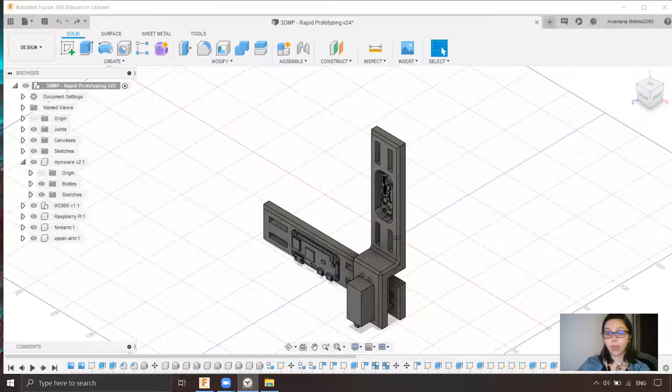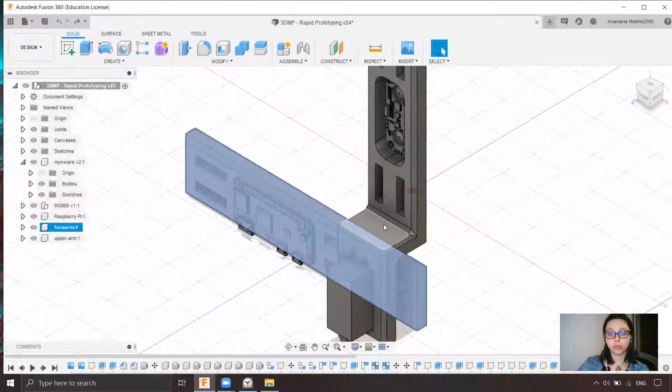Now that we have all the clearance for our hardware components, we can start adding the screws. A very important note is that we will not add the screws to 3D print them, but to properly communicate our design and to see that our 3D printable parts are correctly designed. So we will not create the screws and nuts ourselves.

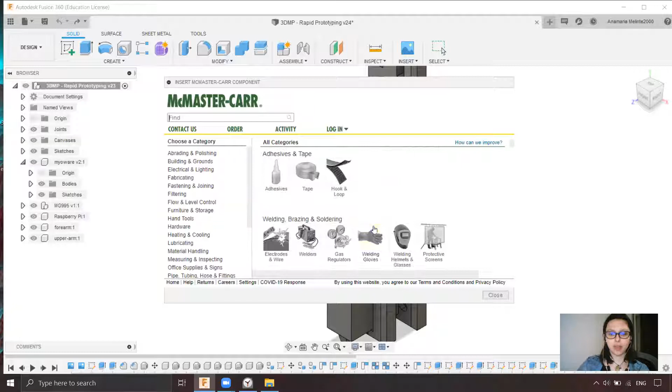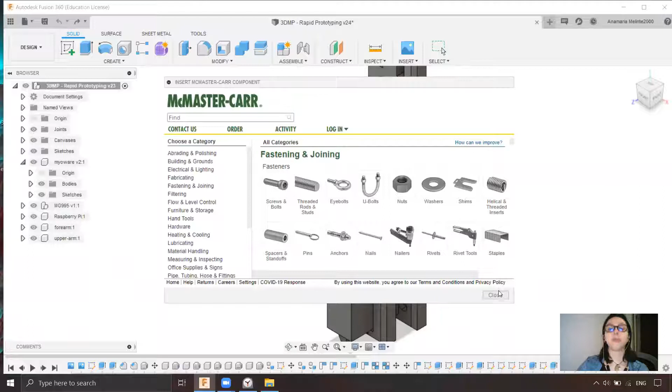We will use a tool called Insert McMaster-Carr Component. This is an entire catalog of bolts, nuts, screws, tape, and other things like bearings and shaft collars. This is a real catalog, you can buy those things. The idea of the catalog is to test the parts in your design, and if they fit, you can buy them.

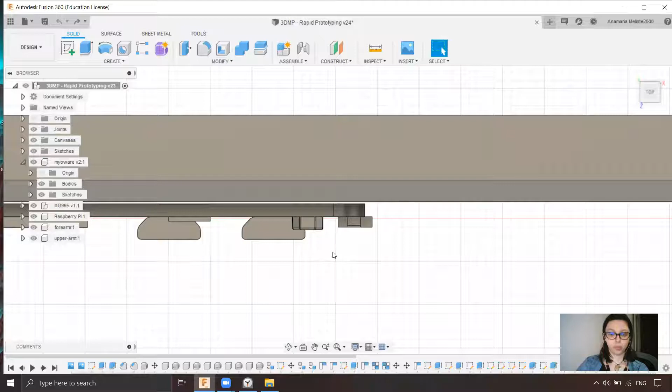But before we browse the catalog, we need to see what's the size of the screw and the nuts that we need. The idea of the screw we'll need for the Raspberry Pi is that it will go from this point to that point, and needs to be a little bit bigger so the nut will fit.

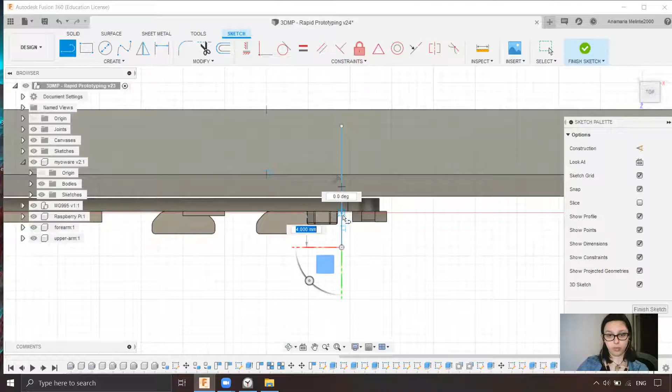Let's create a sketch, but we will not save it, just to see the dimensions. So let's say it will start from this point and go like this. We will use a 2 or 4 millimeter screw. This can work, so we will need a 14 millimeter screw.

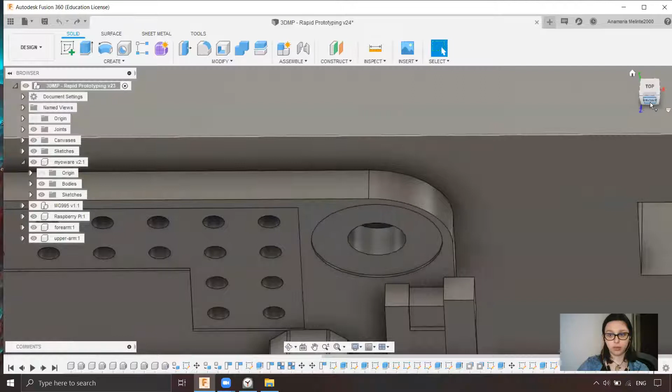I will finish the sketch and click back so the sketch will be deleted. And we need to see the diameter of the hole. That is, let's see, 2.7 millimeters. Here we have a section called comments.

In the comments section, we can add details like dimensions, so when we browse the catalog we can see them again and don't need to remember them. So the diameter will be 2.7 millimeters and the length 14 millimeters. I'll post it.

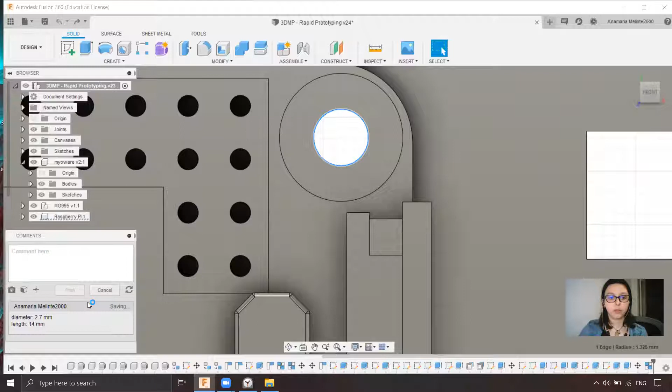Let's go to the catalog, Insert a McMaster-Carr Component, and select our screw. I want a flat head screw with a cross, and I will use the metric system to find the screw. I need a length of 14 millimeters, and I will try different screws to see the schemes.

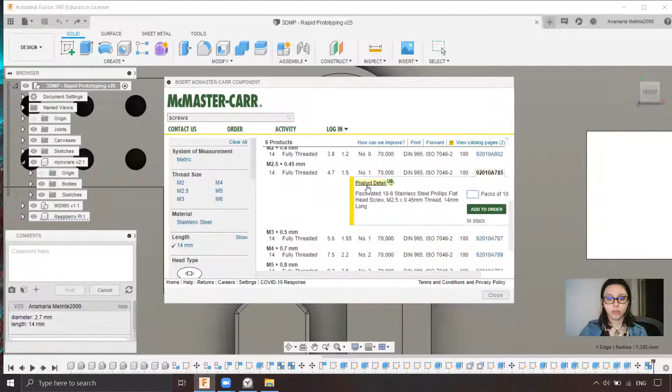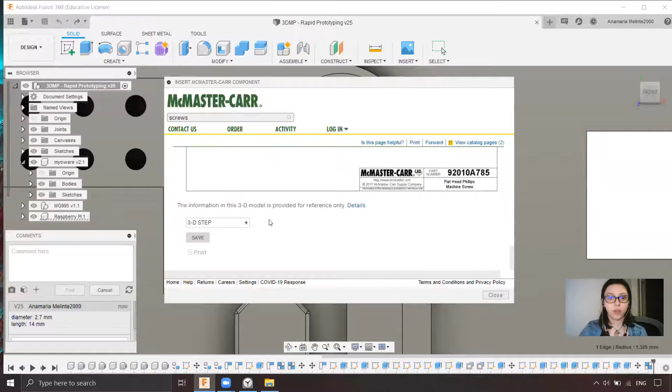If I go to the product detail, I can see the dimensions. This screw has 2.5 millimeters diameter and a length of 14 millimeters. It's perfect. I can go to the 3D step, click save, and it's automatically imported to my design. Now I can use align.

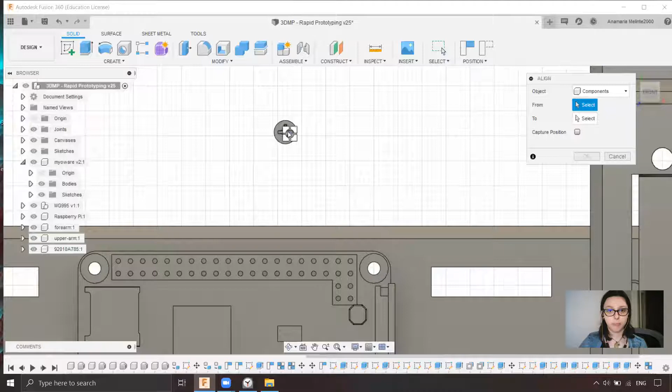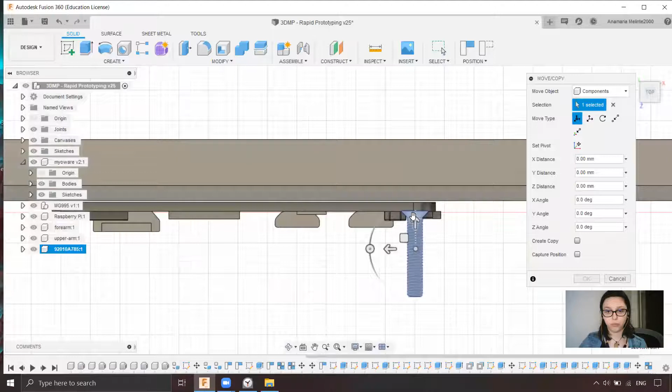I will go to align, select the outer part of the screw, and we will rotate it. And I will move it. I will go to a top view so I can align it properly. Good, I can click OK, and we have the screw perfectly placed.

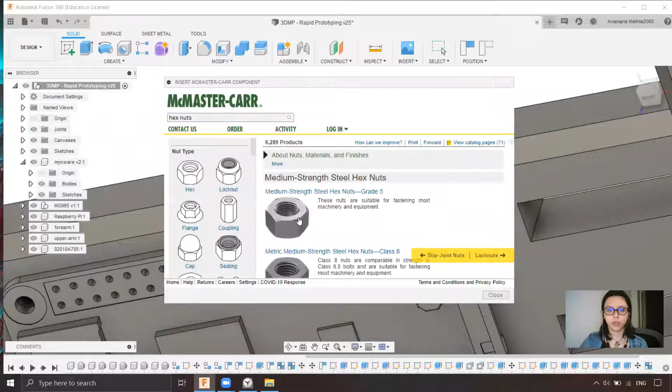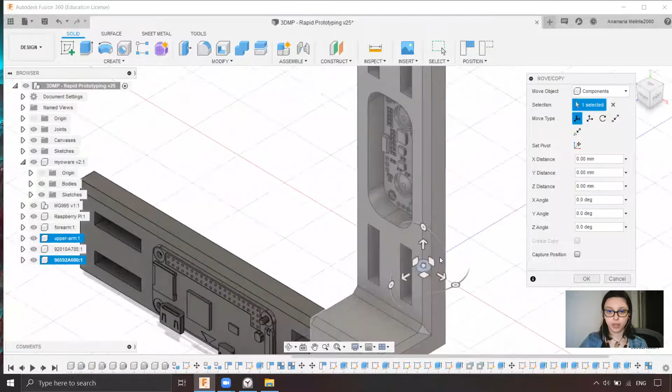We go again to Insert McMaster, and go to the nuts. I will choose a hex nut. I need a nut that has 2.5 millimeters. I can go again to the product details and see the dimensions, which are good. I will click Save, and it's imported to my design.

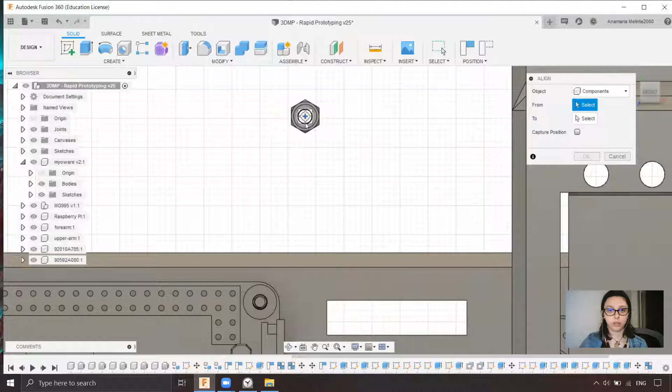I will go again to the front, but first rotate it on this side. So we can align it. Front, I will use again the Align tool, and now I have the screw mounted. I will move it a little bit. So everything is in place.

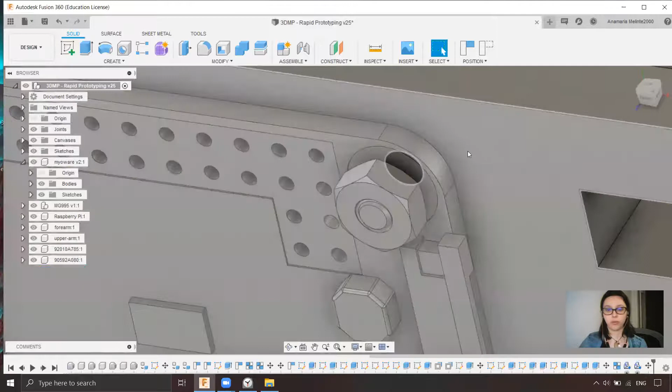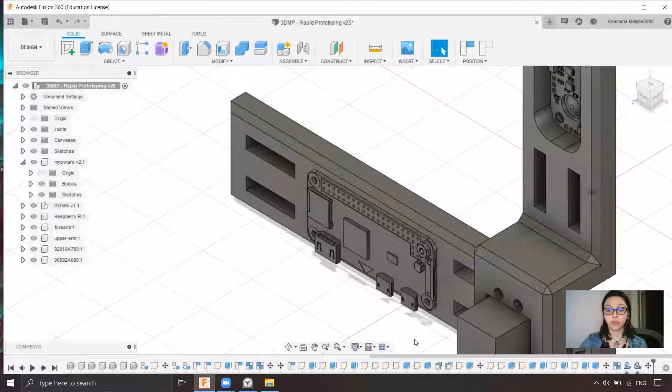As you can see, I have a little bit of space here, but it doesn't need to be perfect. It just needs to be in place, so I can check that everything I designed is okay. I want to repeat again: the screws, the Raspberry Pi, the sensor, and the motor are not here to be 3D printed. They are here to see if my design works and is done correctly.

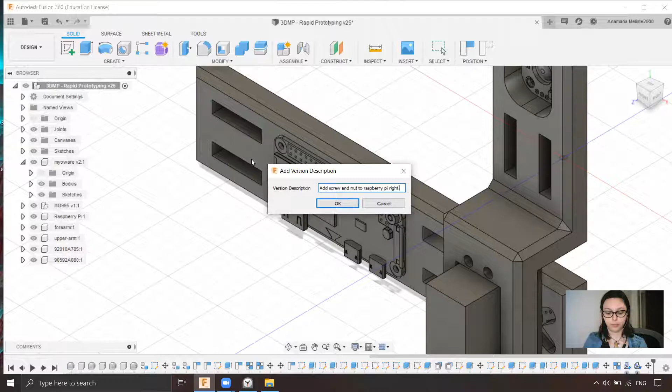Now that I have the screw and the nut, we can click Save. We will come back when we have all the screws for the servo motor, for the rod, for the muscle sensor, and we will continue with other details that we can add on our exoskeleton.